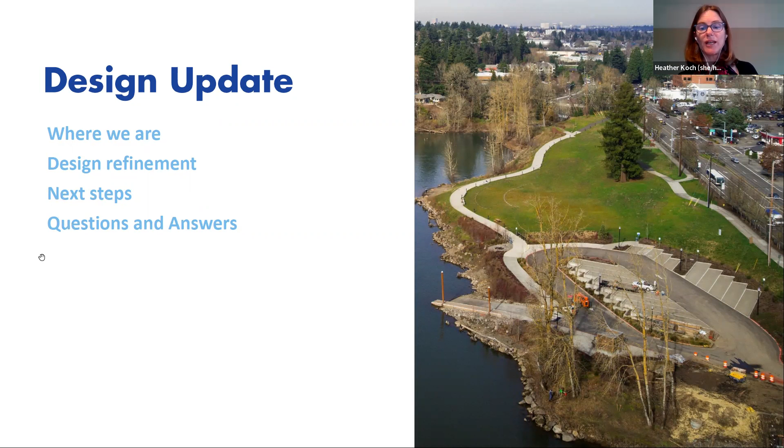So literally, physically, where we are, this is a district-wide amenity, and it's an amazing place where we have this riverfront access like nowhere else in the whole North Clackamas Parks and Recreation District. It's this amazing site right on the Willamette River and sandwiched in between the river and downtown Milwaukie. As you can see from this diagram, the main part of the park is also sandwiched between Johnson Creek and Kellogg Creek. So we have even more natural amenities there.

And we have things like the existing trolley trail that today brings bikes and pedestrians and other path users through and to the park. We have pedestrian crossings over McLoughlin Boulevard that connect people from the site to the downtown.

And that's important, not just because there's people who live downtown and visit downtown, but also because we have the Orange Line that brings people from further flung places, and also various bus lines that come into downtown. So the downtown connection is actually helpful for the entire district.

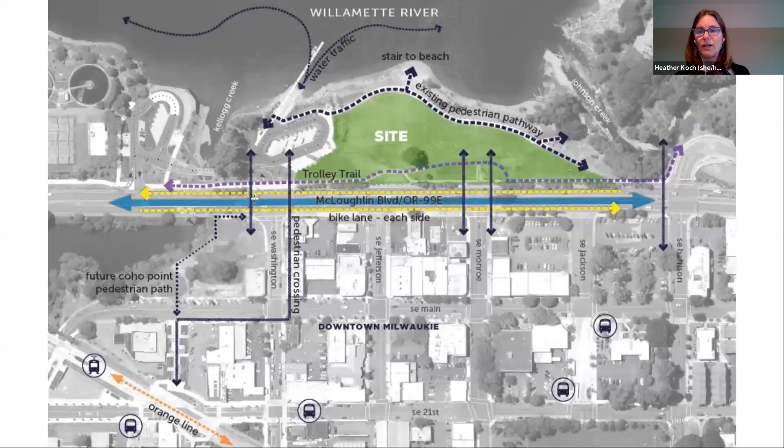We also have two parking lots on site, and we have a boat ramp and a boarding dock that lets water traffic come and go from Milwaukie Bay Park. This is a popular place for boats to put in, both motorized and non-motorized. So that's physically where we are. And I neglected to mention the more obvious piece: it's right along McLoughlin Boulevard, otherwise known as Oregon 99E.

As far as where we are in the process, we're really in the most recent phase. Someone on the chat said they were involved back in the 80s, and truly this project does go back to the 70s from what I've learned. That was a popular time for people to start turning to the rivers. Historically with industry, a lot of people had turned their backs to the rivers—they were dirty, often unpleasant. They weren't the sort of recreational amenities we think about today, or even places good for habitat. So a lot of work went into just getting to where we are today.

In 2015, the city did phase 2 of the park to develop the boat ramp, the parking lots, and the Riverside Pathway. But the park was not completed—it's just a very big effort to complete the whole park. So in 2018, we teamed up with the city of Milwaukie to lead the final design effort to complete Milwaukie Bay Park. By 2019, after meeting with many hundreds of people in the community, we presented this final schematic design.

That was basically the blueprint for how we would proceed with the park design. Over the ensuing two years, we've been working on funding and other agreements necessary to construct the park. It's a pretty big project with a pretty big price tag, and we want to get it right, so we've been working really hard on those agreements. We are still working on them as we speak—before we go to construction, we still have some work to do.

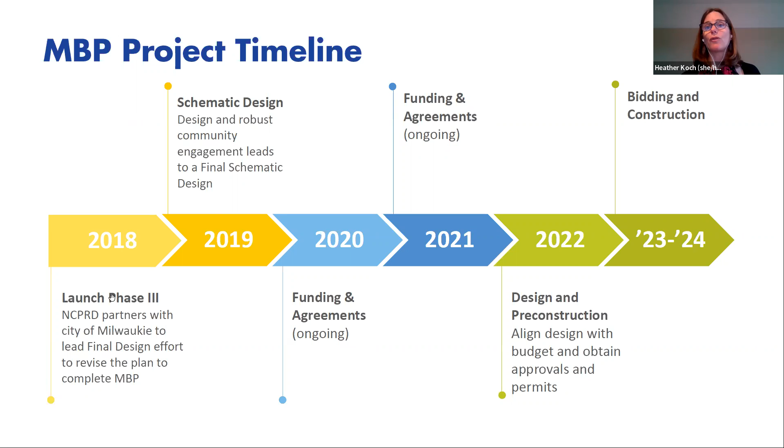Just a quick word on our work with the community. For those who weren't involved in the 2018-19 phase, we asked the community a lot of questions, and people came out and really wanted to talk about the project. Talking to over 1,300 people at many different events, we found out things like: people wanted nature play and a water feature more like a nature spray element. People wanted to make sure those were safe and away from the street. People wanted the restroom near those things. It sounds simple, but those are important things to consider in the design.

People wanted a flexible space and an amphitheater, potentially a performance space. They also wanted multiple picnic areas, and they want shade—they still want shade. People also wanted natural areas and views, as well as inviting entryways and universal access—ADA access for people with disabilities, but really trying to create access for people of any ability and any background. This is a partial list; you can see it's a lot of things. We're trying to do a lot on this site, but we're very committed to meeting the goals of this project whenever possible.

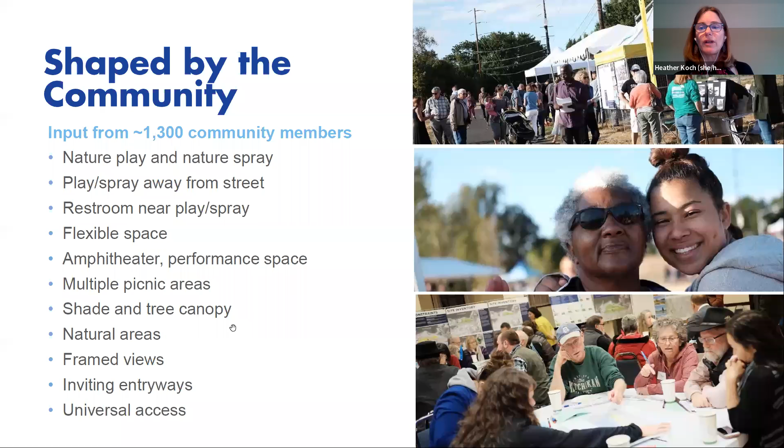So in the design refinement, what we're essentially doing by adding this design detail is trying to align our design and its costs with the funding we have. There's only so much money for the project, so we have to design something realistic based on the cost today. Right now, Jonathan and his team, and our contractor team, have been working extremely hard looking at ways to be efficient in the design—how we lay out the pathways, where we cut the slope and where we don't—and also looking at cost savings, like things we can do with materials.

Are there different efficiencies in the way we phase the project that saves money? All of that goes into delivering more for the money that we have.

We're also looking at preserving key features and functions, so the main program elements of the project, like the playground. We want to make sure we keep those things as much as possible in terms of how they were envisioned.

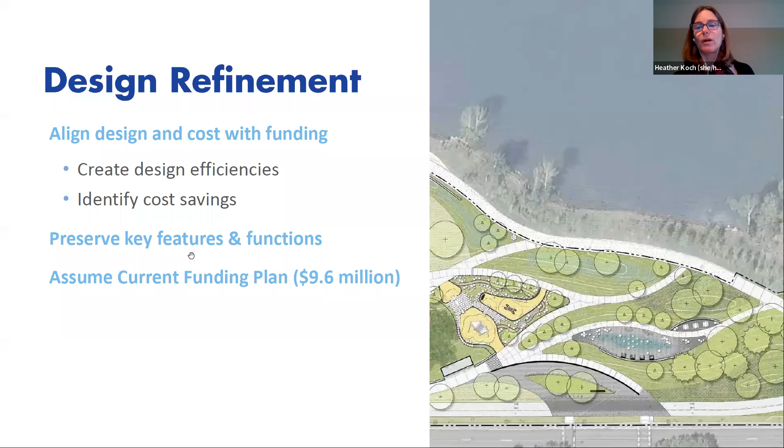We also are assuming the current funding plan. Some of you have followed the project closely and know we've been talking about a $9.6 million cost for quite a long time. That's all the construction costs, design costs, basically all the costs of putting this project to its final phase, and we're not changing that. We're assuming the same funding plan, even as costs fluctuate with market conditions today.

This is really a very diagrammatic look at 2019 design versus today. If you back up and look away, you can see the big chunks are really very much the same. We still have a large lawn and amphitheater for the flexible space, a play area, water feature, and restroom. They look just a little bit different because of the design details. We keep even what I'd say are the lesser known elements, like picnic areas, plazas, and certainly walkways. So this is what I mean when I say we're trying to preserve the major features and functions of the park as much as possible.

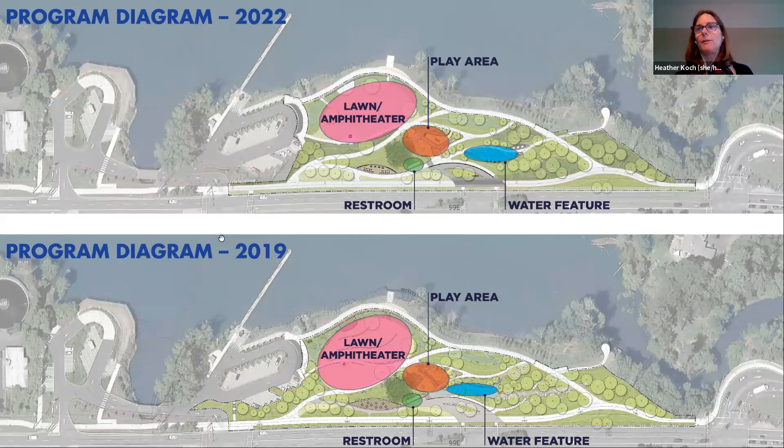This diagram is online along with most of these materials, and our whole presentation will be up as well. I'm not going to spend too much time going over all the details here, but you can spend more time with it online. I know some of you had a chance to look ahead of time, but here are a few important features we'll talk about today.

We'll talk about the amphitheater, the play area, the water feature, the trolley trail, and then show some images that bring in some of the other elements. But a couple of things we won't zoom in on quite as much.

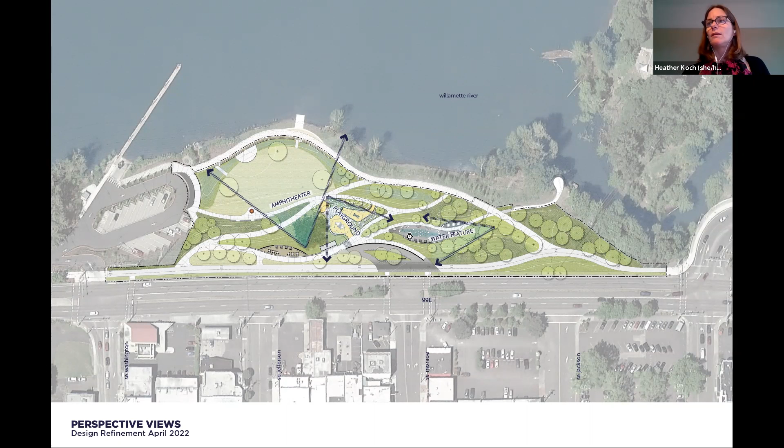So this first view is the amphitheater. This is a representation of what the amphitheater would look like based on the design. You can see in this picture this is where we have the grass on the site, where we have a stage for performances, or it becomes a platform during times when there isn't a performance. In general, it becomes a large, flexible gathering and event space—whether it's a concert, a movie, a performance, or a festival.

And even though this is not a true representative design, this is the location of the fire pit. This would be for special events. People have asked whether they could use this every day, but it would be for special events because it has a certain amount of risk. That fire pit is kind of a tradition on the site and something we wanted to incorporate.

And you start to get a sense in this picture of the way the pathways meander through the site and how that helps people navigate.

So the second thing I wanted to show you is the play area. It has nature play, climbing-type structure envisioned in this large zone here. It also has a more motion-oriented play element—in this case, a multi-person seesaw type piece of play equipment.

We also have slides, which is not uncommon in a park, but part of the reason they're here in particular is because this site has a lot of slope, and the slides basically make fun of the slopes we have. So instead of designing around the slope and it being tricky, we're incorporating slides to make the slope of the site really fun.

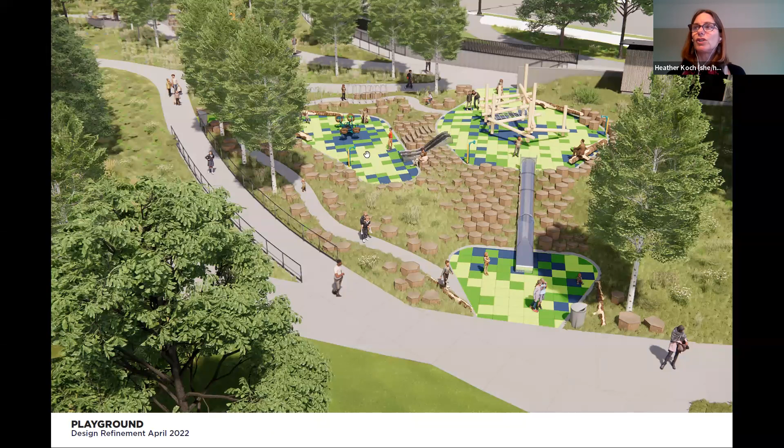As you'll see in the next diagram, those different areas we were showing are all at different levels in the park. Again, because there's a lot of slope on the site, you'd have an upper, middle, and lower play area all connected in different ways. This depiction shows a slide that's covered and one that's uncovered, a big slide, a small slide, and again the different kinds of play equipment.

Part of what's represented here also are some boulders, based on feedback we've had from people and from other park projects where kids really like to scramble on boulders—they become a play element, a very natural one. So we're looking at ways to incorporate boulders to give kids ways to scramble around and play a bit like you would in a more natural environment.

I'll throw this in because someone mentioned it in the questions we received online: this play area surfacing being depicted is a rubberized play surface, and it actually comes in mats or blocks, which is terrific because if one gets damaged or worn out, you can just replace that block. It's designed to provide a safe playground surface as required by national standards.

So the water feature area—again, kind of hard to get a sense for it in this bird's eye and plan view—but you can see it's close to the play area, close to the restroom, but still removed from the plaza, especially because it's a little bit down the hill. This is a ramp coming down here. So this gives a sense of what it would look like with some boulders for sitting, some spray that comes up from the pavement, some seating for people to enjoy being around it, and generally a great place for people to play and cool off.

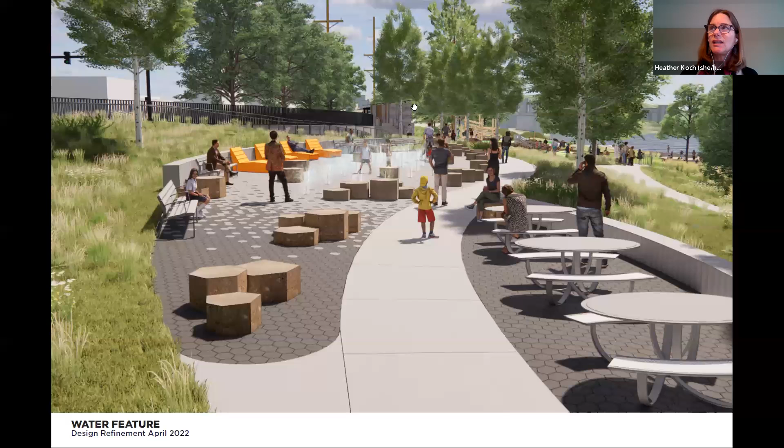This is a depiction again looking south, so you can see the restroom building in the background, and even this little roof structure—that's a picnic trellis over the picnic area for some shade. So this gives you an idea of how all these elements fit together. You can see the play area, the river, the amphitheater, this close-by picnic area—trying to weave a lot of things together pretty tightly on the site.

And then finally, the other feature I wanted to zoom in on was our trolley trail. As many of you know, we already have some pathways constituting the trolley trail, but we're looking at improvements to make it safer and easier to navigate. Mostly that's by providing a wider and straighter pathway with much clearer signals about who goes where. We're trying to work on a design and materials that give pedestrians and cyclists clear signals about where they are to be safe.

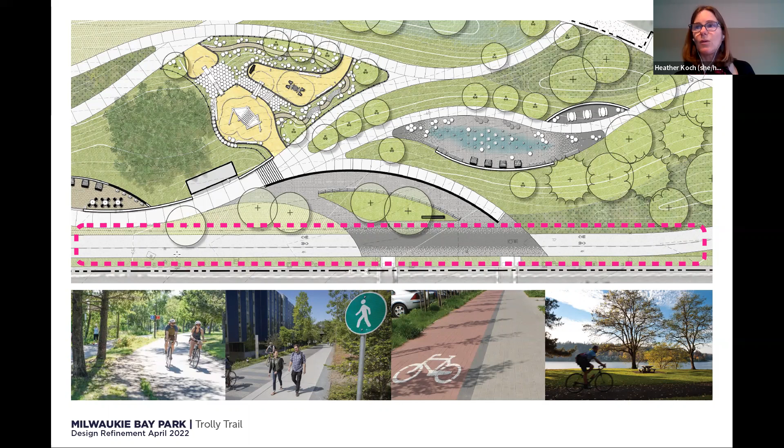So these are some examples of different types of arrangements you can see in different places. Some paths separate, some don't. We're working on those design details right now.

This gives you a sense of how much wider the pathways will be. The existing sidewalk at the north end is under 8 feet, pretty narrow for cyclists and pedestrians, which can cause conflicts and safety concerns. Some places have wider sections, but not throughout. The new proposal is a 14-foot wide path with room for pedestrians and bikes, much less likely to present conflicts.

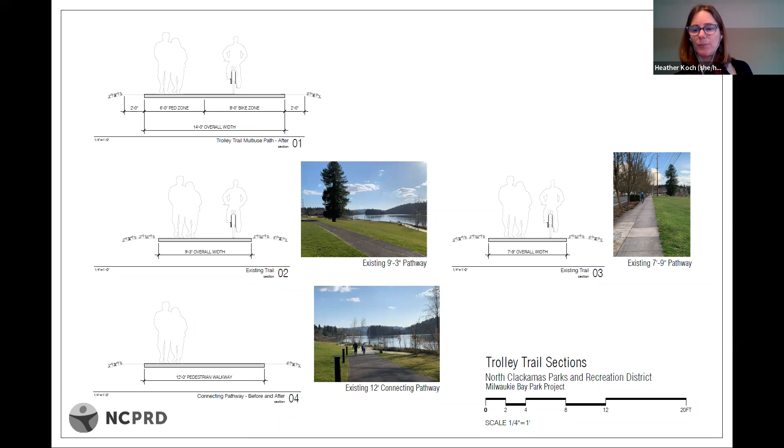Okay, so next steps. We're in this phase right now, called design development, or refining the design. At this stage we design and then get a cost, see how close we get, then design again and get a cost. We do that iterative process to target the budget we have, and we're working hard to get the most for our money. This is the design period we're in, and why we wanted to keep you updated on how the design is progressing.

From summer through fall, we'll move into the more technical detail of construction documents—translating the design so we can hand it to someone to build. We also redo cost estimates and begin getting approvals from different agencies, including the city. Governing bodies have to sign off at several levels. We do that through the winter, ideally readying us for construction in the spring. So even with many steps remaining, we're continuing to finalize the design so we can move into construction.

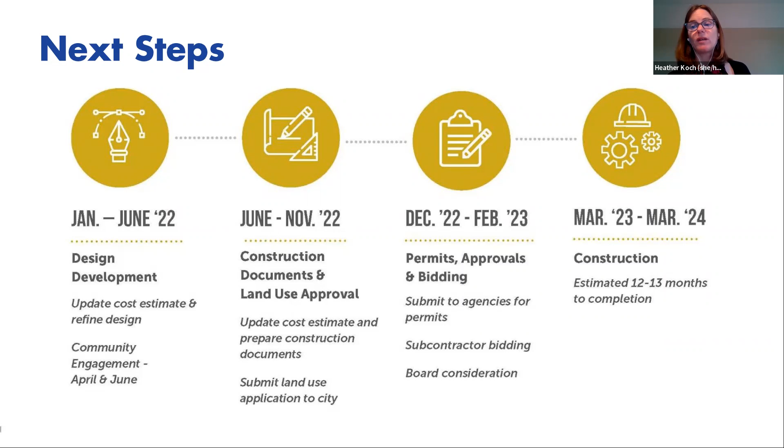With that, we wanted to address a few questions. There were some common themes in the questions we received. I want to address these first, then give you a chance to ask others or elaborate. Before I turn it over to Melina, I'll talk a bit about some of these basic questions, trying to give succinct answers.

One question was about adding a skate park. We've had that feedback at different times in the project. This particular site didn't have room for a skate park, but it's something we want to keep thinking about as a district. As we continue next year with a process to identify district-wide needs for the future of NCPRD, that's exactly the feedback we want, so we can figure out where a potential skate park could go, where it would fit, and how it could be paid for. But we didn't have room at this site for one.

Another question was about the proposed safety surfacing. As I mentioned, it's a rubberized tile for the playground safety surfacing—pretty common.

There was a question about adding more variety to the playground. Nothing is set in stone, but we proposed these elements because they fit within the areas we have for flat surfaces. We can elaborate further with Jonathan later if needed. We've looked at whether something like a disc swing might fit somewhere in lieu of another element. One thing to be mindful of: it can look like there's room for more, but we have to create fall zones, so we can't just add things without ensuring proper fall zones. We're trying to dial in those play options, so let us know if you have more questions on that tonight.

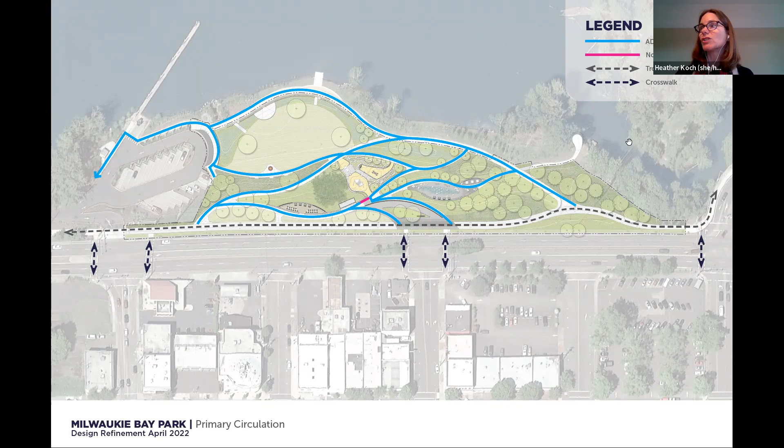It is actually outside of our project area, so we aren't changing the sight lines there. That is historically an area managed between the city and the Oregon Department of Transportation, so any potential improvements in the future would be between those jurisdictions. Which direction are the curb cuts facing? Again, we're not touching that intersection, so we don't have any new cuts.

Finally, I left this one for last because I have a slide on this: what are the plans to increase parking? Right now, we are not increasing parking at the park. We have 3.5 acres that's been designated for park instead of parking.

What we do have are the 38 spots in these two lots that were built in 2015. There's 19 that are vehicular parking spots and 19 for vehicles with trailers, and that was specifically done because of the boat ramp, which you can see just coming off that picture. So they needed to provide vehicle parking with trailer capacity.

The rest of the parking is downtown parking, and this map is actually part of a bigger map, so the downtown options can be better seen if you go to www.milwaukieoregon.gov/parking, the city's website on parking. But this slide does give you an idea of the different types of options.

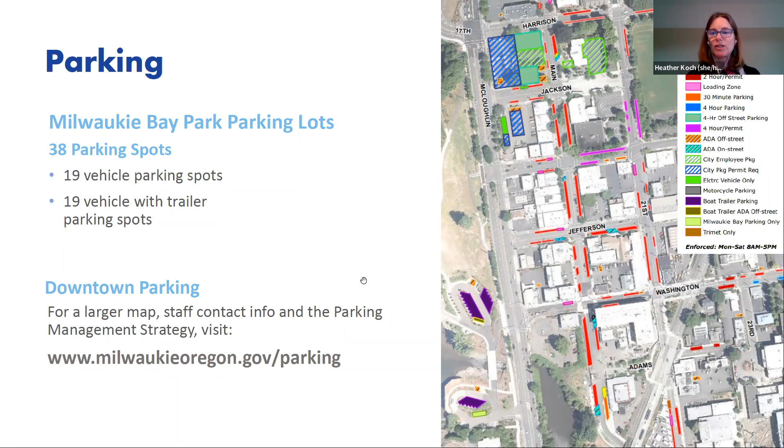All the red you're seeing is 2-hour parking. Some of the green is off-street parking, that's 4-hour parking. And then there's a lot of other parking that's permit parking. The reason that's relevant is because permit parking gets people off the street who might be working, so that there's street parking available for visitors. You can find out more by going to that website, which also has a parking management strategy and a staff contact.

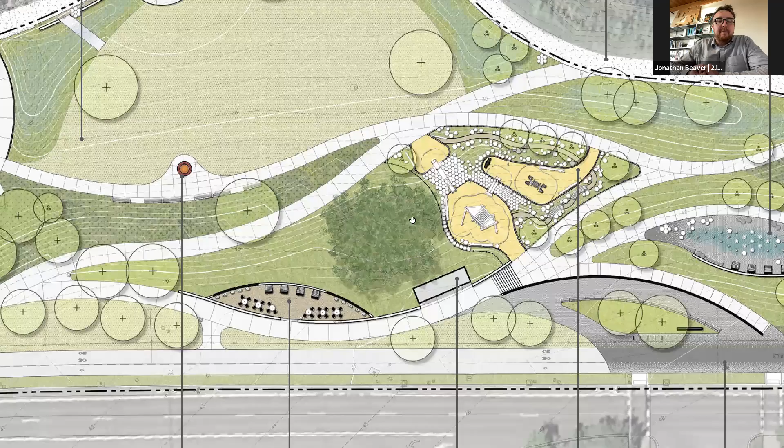Thank you, Heather. That's a really great question. As Heather mentioned, one of the real constraints we have on the site is the topography. So a lot of the green space you see between the play areas is really sloped areas that are difficult to accommodate additional equipment.

That said, we are continuing to look at this area, so we'll continue to take any feedback we get in terms of pieces we think might be appropriate here. If we were able to add an additional piece, I think it would have to be a much smaller piece than what we're showing currently. But as Heather mentioned, this is still a work in progress, so we're really open to any ideas that come out of this.

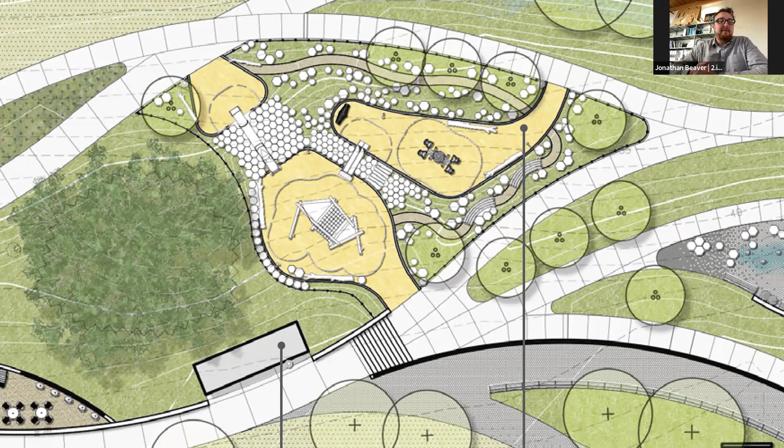And I will just add, if you have experience with play equipment, either in your line of work or because you're a park user with your kids, grandkids, nephews, nieces, whatever, we have that email - I'll put it up again at the end - it's info@ncprd.com. We read all those comments and gather them up for the design team to consider if there are some ideas we can incorporate.

Thank you, Lisa. Great, so the next one is from Jill. The photo did not show much shade at the amphitheater. What is the plan for that?

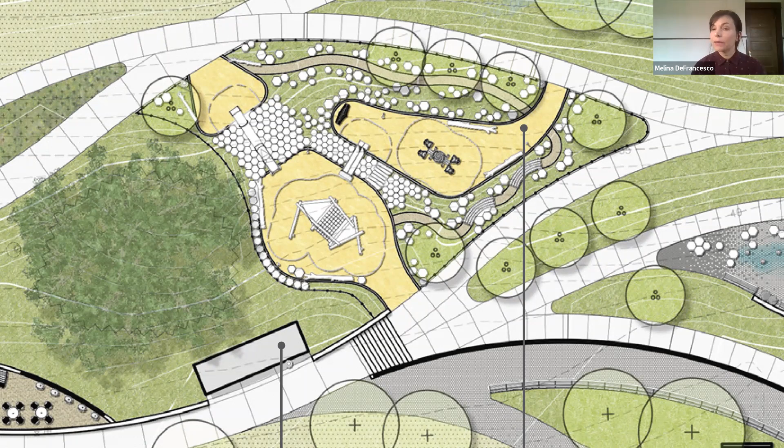Thank you, Jill, that's a good question. We're trying to strike this balance between providing shade and also preserving views, which have both been the stated goals of the project. So we're trying to plant some trees that will have larger diameter canopy, as shown, to provide greater amounts of shade while still preserving some of these kind of framed views, like out this way and out this way.

For the stage itself, typically what would occur is we would have people bring in tents for events, so they create shade for the stage that way. But right now we have less shade in the amphitheater because we're preserving those views. Jonathan, is there anything else you wanted to add from a plantings perspective that I didn't cover?

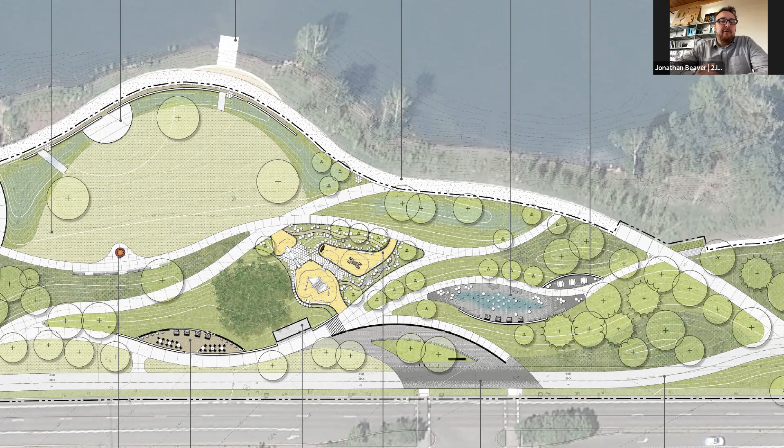No, I think only that this is an area we're continuing to study, and we're starting to look at these view sheds a little more carefully in our 3D model. Any opportunities we have to plant additional trees that don't impact site uses or the view sheds that Heather mentioned, we'll definitely be looking at.

Okay, so next question, also from Jill: In your research, is that enough restrooms for the large area? Seems like there should be another one on the riverside. Yeah, thank you, Jill, that's a really good question.

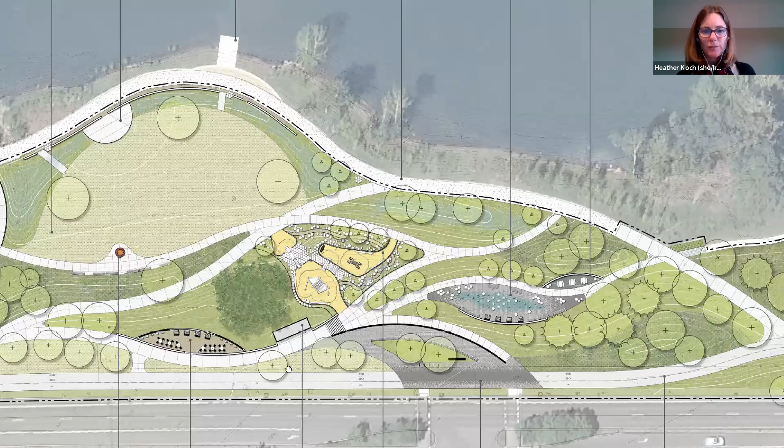We're trying to provide restrooms for what we consider the everyday condition, which we expect to be greater than today, but not like a big festival every day. So today on the site we have a restroom here at the top of the loading area, and that's also ADA accessible, and we'll have two in here. When we require restrooms for an event, we do some calculations based on the numbers, and three restrooms is really the right number for everyday use.

But for larger events, we do this at all our parks - we bring in portable toilets just for those events. So we're looking at confirming areas on the site where we can actually stage those portable toilets for events, so we don't have to build and maintain a lot of expensive restrooms, because they do take a lot of maintenance. We want to build what we need daily and then bring in portable toilets for the rest.

If we have a large event there, you are absolutely right, there are not enough restrooms in the buildings. We absolutely have to require those, whether it's us putting on an event or someone permitting a special use of the park for an event. Thank you for that question, that's a really good question.

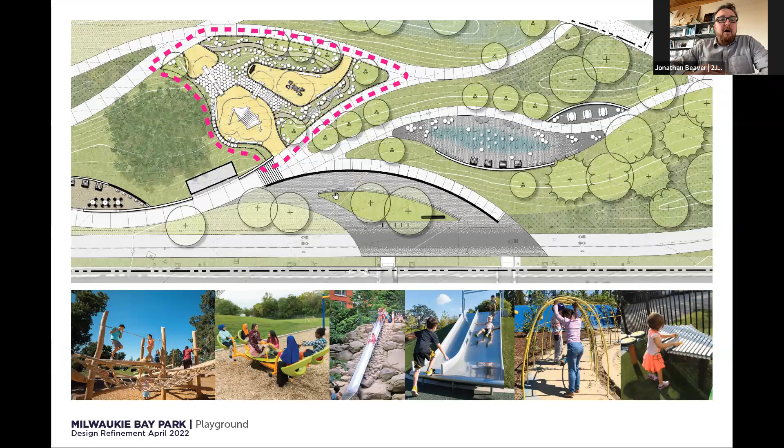That's a really great question. We're working hard on a steep site to provide as much accessibility as possible to the playground. You'll notice from the perspective rendering and the plan that the playground exists on three separate levels, all connected together with pathways that are ADA accessible. The surfacing we've chosen for the equipment, a rubberized tile, is a great surface for people with mobility challenges. The equipment we've chosen for the most part is available for kids of all abilities. It's a challenging site, but we're working really hard to provide access to all areas of the playground.

Thank you, Jonathan. The next one is from Sherry. Why is it called the trolley trail?

The trolley trail was mostly built in 2009 and 2010, most segments in that general time frame. Historically, the old trolley went from Portland all the way down the river, right through this site. The original trolley line, run by the Portland Traction Railroad Company, goes through this site. When regional discussions started over 20 years ago about using that old trolley alignment for a trail, the idea got popular very fast, and it took a lot of work with Metro regional government and local entities like NCPRD to make it happen. Even entities like TriMet that built the light rail stations played a pivotal role. So essentially, the trolley trail is built on the old alignment of the trolley line, and that's how it got its name.

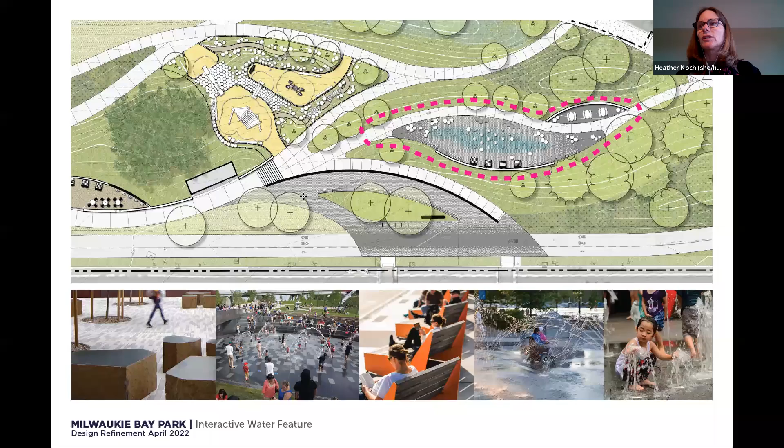What we have done on this site is really try to keep the major play elements up slope. We've kept these elements kind of high up on the site, to both be away from the street and away from the river. So essentially what we're trying to do is put some distance between kids and the river.

And it's true, we do assume that they need to be under a watchful eye in a river environment, just like any river environment. One thing we're looking at specifically with the play area, since it's such a draw, is doing some sort of fencing around it. It wouldn't be solid fencing that someone couldn't go through, but it would be a visual barrier to remind people that the play area is inside that boundary versus outside.

Some of the other physical barriers also provide kind of visual cues. Whenever we have these darker green areas, that's when we'll be elaborating on the planting plan for things other than grass. So once we start putting some of that vegetation in, I think it sends a pretty strong signal that there's a barrier. It doesn't mean you don't have to keep a watchful eye on your kids, but it does give people some cues about that. There is also vegetation on the slope of the hill.

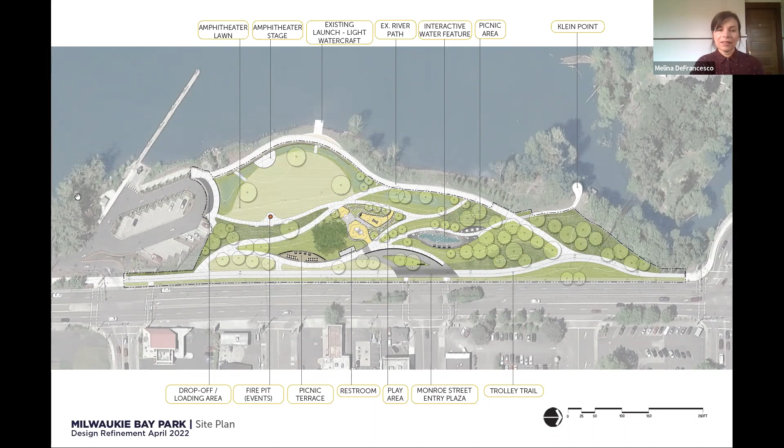So that is the last of the questions. I'm going to look really quick just to make sure there are no hands up again. It doesn't appear so, and I believe that is it. And you're right on time.

Oh, actually, one more snuck in, so I'm going to read that really quick if that's okay. It's from Jay: is swimming allowed in the river within the park parameters? Today, swimming is not prohibited or actively permitted. So they would continue in that fashion. We see people swim there today. We don't monitor swimming, and the city doesn't monitor swimming.

That's it, no more questions. I guess if there are no more questions, I would also just pitch it to our team to see if anyone had anything that they felt like needed filled in from the comments we already provided.

I just want to say thanks to both Heather and Melina and Jonathan and Amber and all the folks that came out to see the presentation and the nice comments. We are really happy with where we're at this point in the design. Is everything figured out? Absolutely not. Lots of little details, but we appreciate everybody's comments and questions.